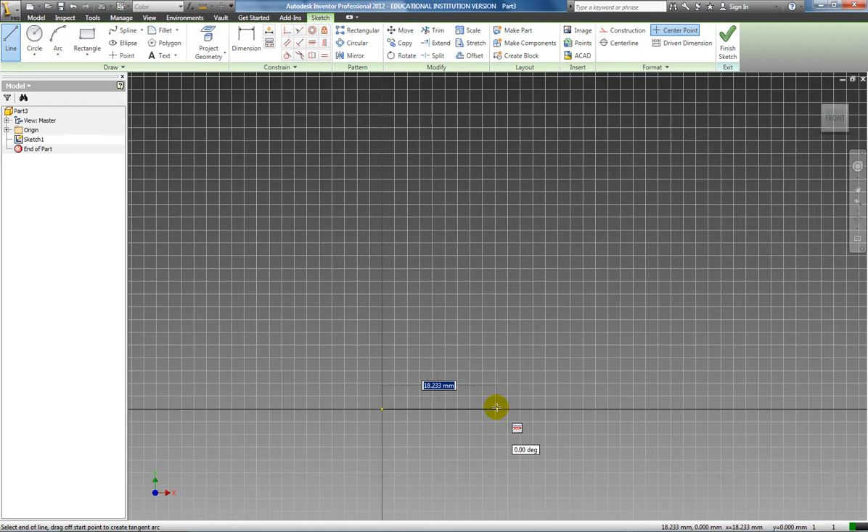I'm going to start with just doing a line, and draw a line straight across the bottom at 155. That's going to take me out to the limits of the screen that I need to complete this part, and then from there I'm going to make this go up 30.

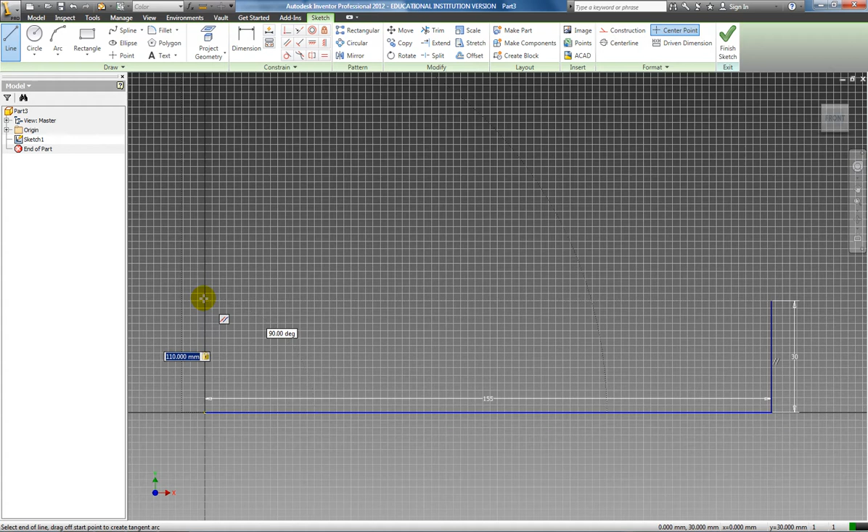Now I'm going to stop the line command on that side, go back to the line command, and begin working up this side. It is 110 up this side, and then that is going to come across 60, and then come down 30.

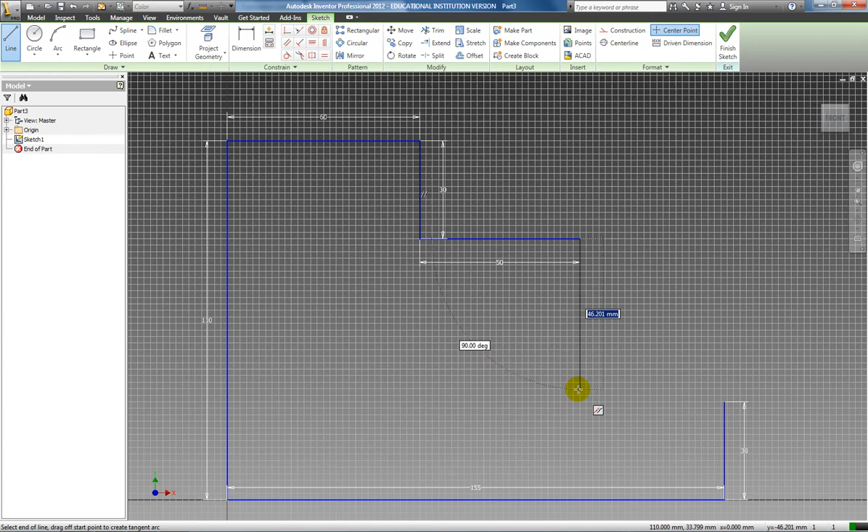Now, rather than concerning myself with this arc, I'm just going to bring this out 50. And then I should be able to go down 50, and it should be a horizontal line connecting those two pieces together.

That is all I am going to place in this first sketch. I'll go ahead and finish this sketch, orient it so it looks more like the picture in the book, and extrude this its thickness of 10.

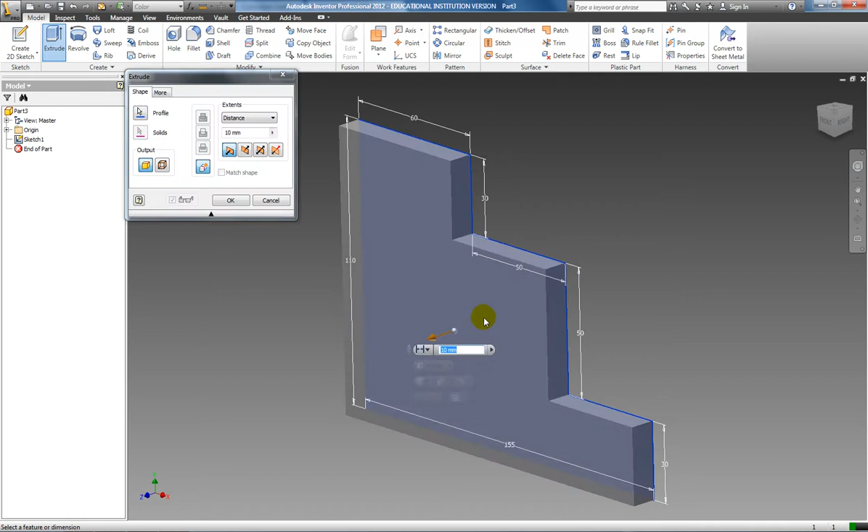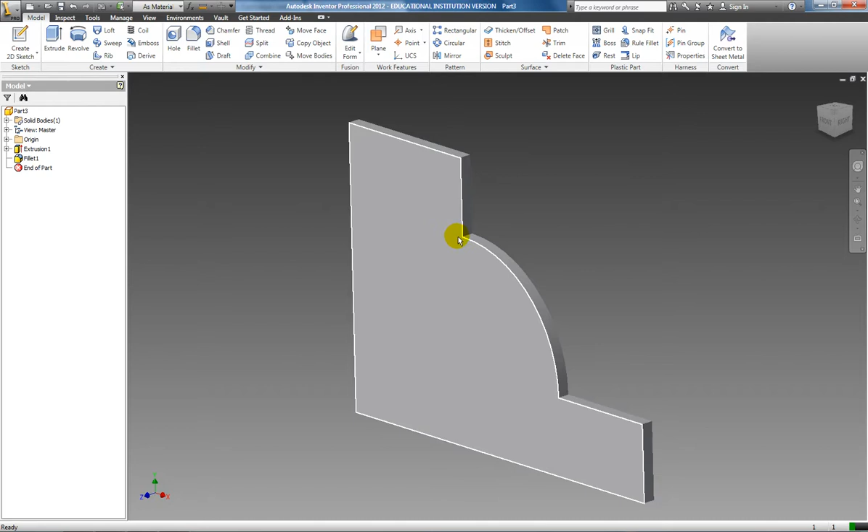Having that done, I'm going to put a fillet on this edge right here with a radius of 50. That's going to place that curved section in here. It's a lot easier to do it that way than locate the circle and get everything in there for the initial sketch. The next thing I need to do is a new sketch on this surface.

I'm going to start this sketch by doing an offset. I don't want to offset the whole thing, so after I click offset, I right click and uncheck loop select. That'll allow me to pick just one line, and I should be able to offset that the 20 that I need.

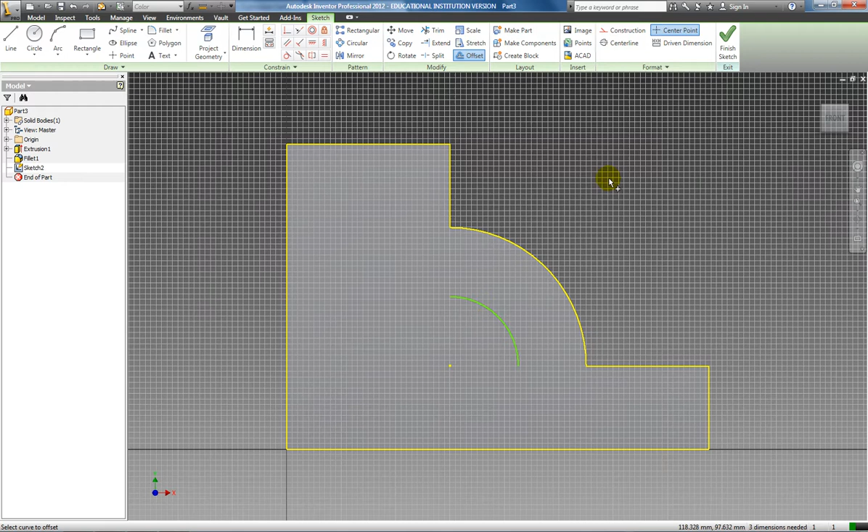So I'm going to dimension from here to here at 20. Since this is already lined up with here, which it's supposed to be, I can just go ahead and draw my horizontal line here, vertical line here, and horizontal line here, and then dimension from here to here, which in this case is going to be 20.

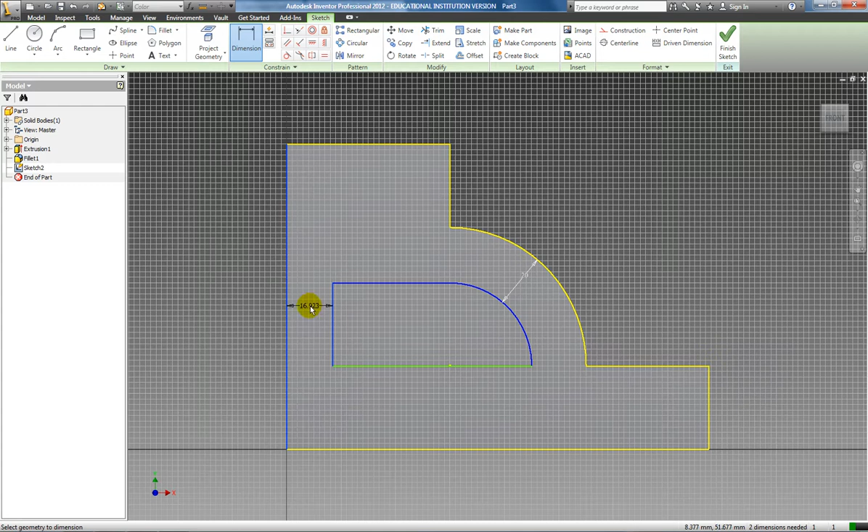The only other dimension I'm missing is this one to the bottom, but at the same time I can also do a collinear constraint between here and here, and that's going to give me a fully constrained section.

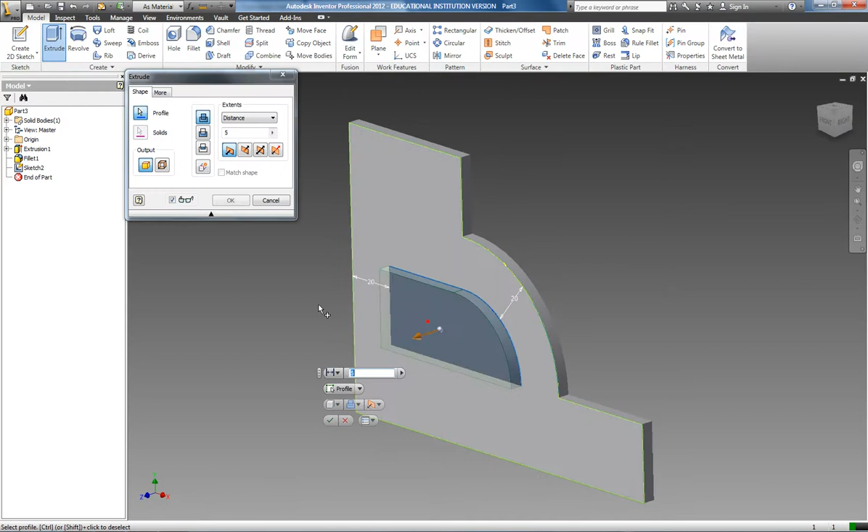I can now finish this sketch and extrude this piece using cut through all to get that cutout shape in there.

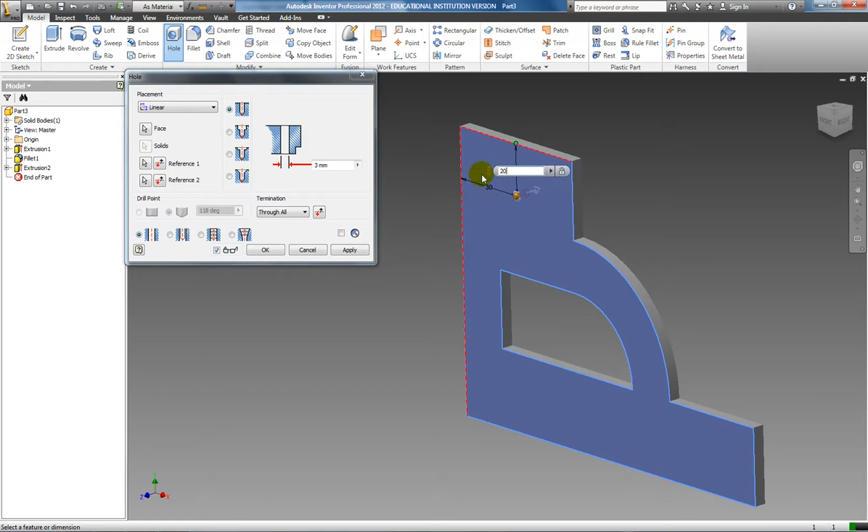Next I'll use the hole command, and locate a hole on this face from this edge and the top edge, and this edge right here. It is going to be 30 over, and 20 down from the top. It goes through all and has a diameter of 30.

I can say apply to that one, and then I'm going to immediately go ahead and place my next hole, which is going to go right here. Its diameter is much smaller, it's only 12, but it is located using this left edge and the bottom edge. From the bottom it is 15, from the left edge it is 20. I'll go ahead and apply that hole and then cancel out.

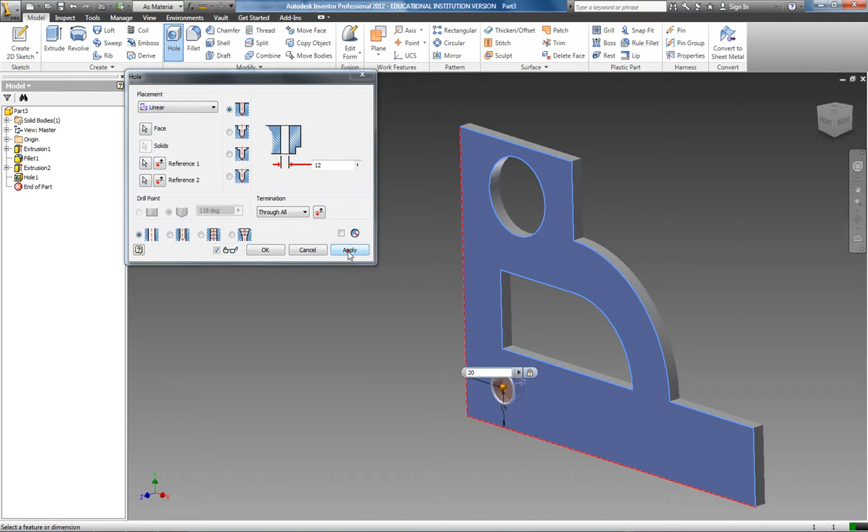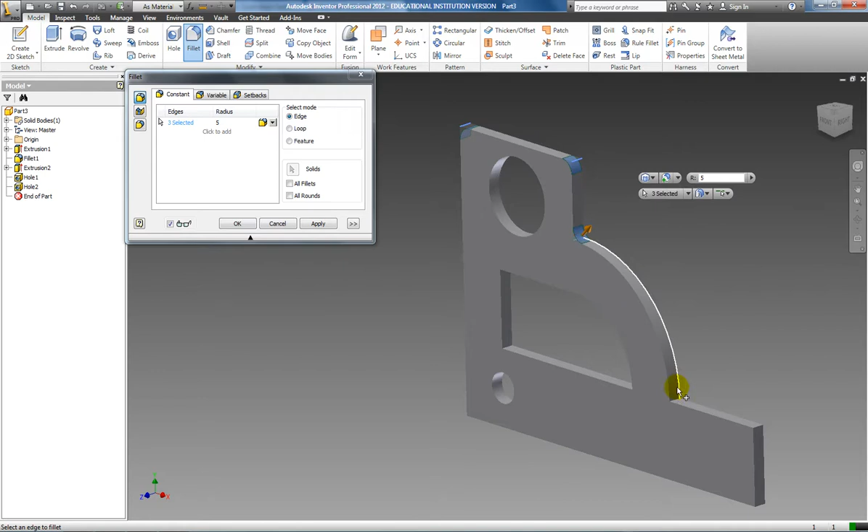I can do everything else I need through different features. The first feature I need is to use the fillet feature with a radius of 5. I now need to select all the edges that are going to be filleted in this particular model, which include this one, this one, this one, this one, this one, and then the internal edges on this piece right here.

So just a double check of the actual drawing. I've got the top two, I've got these two, this one, and all of those. I can go ahead and apply that.

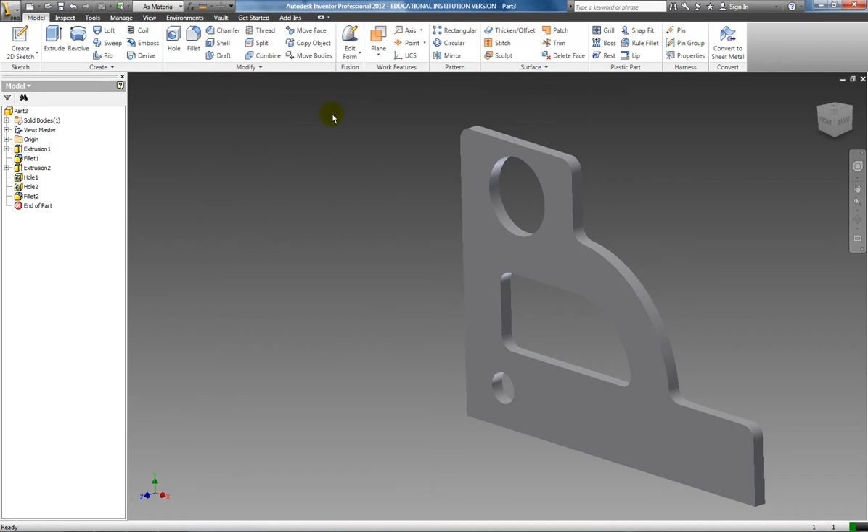Then I'm going to go to my rectangular pattern, and select this hole as my feature, with direction 1 being along this line. Now the arrow is pointing the wrong way, so I want to flip that. And I know there are 7 holes, spaced 20 millimeters apart. So the preview looks good, I can go ahead and say OK.

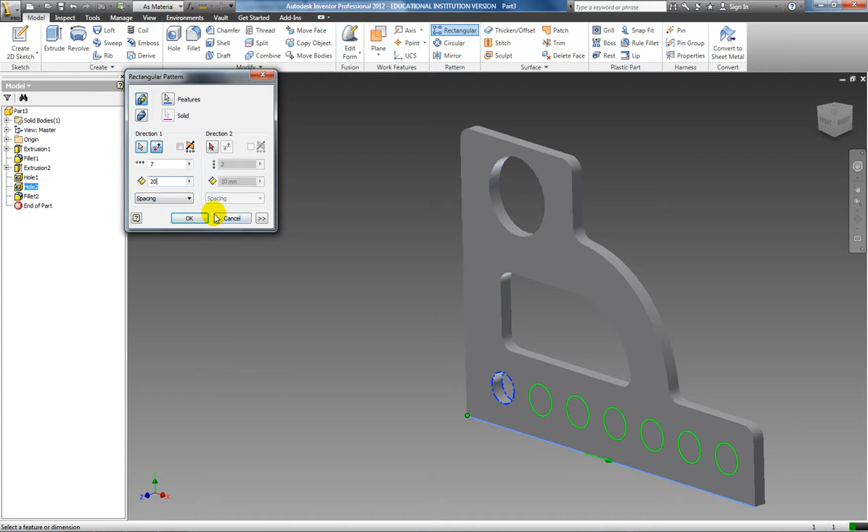And what I'm left with is exercise P2-15, which initially looks like a pretty complex exercise, but when you really break it down based off of what needs to be sketched and what can be added as a feature, it's really not all that difficult.